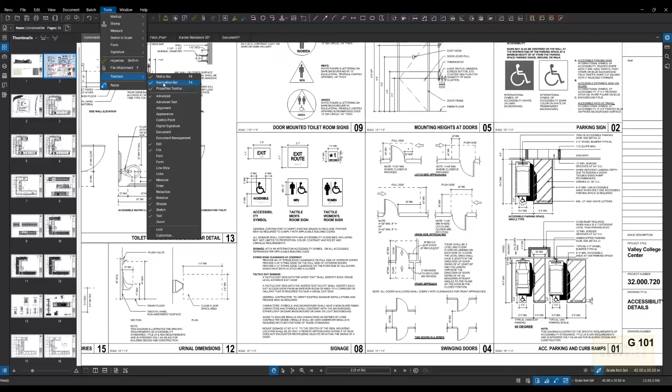Next, I'm going to go to the Tools menu. One thing I go through in all my classes is to make sure, if you go down to toolbars here, you have these top three turned on: the status bar, navigation bar, and properties bar. There's a lot of tools in here that people don't realize are there, so we're going to show you what those do. They come down here, the status bar and the navigation bar.

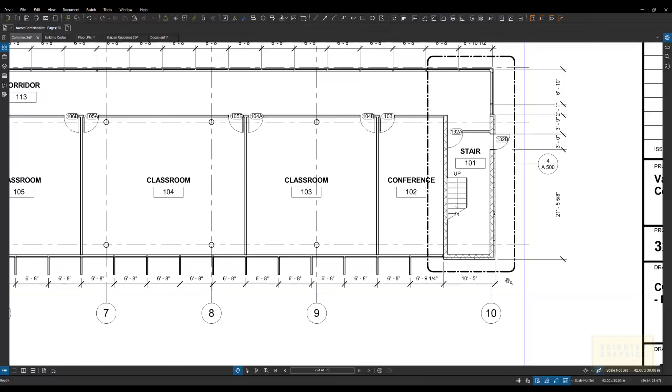This top one is the navigation bar. I'm going to jump to another sheet here. Way over to the right side, you see this little button that says disable line weights. I have mine disabled. If I turn that on, you'll start to see the thickness of those walls show up. You can turn the line weights on and off. Sometimes that helps you with measuring and things like that.

Right next to that is a dimmer. So if you have a lot of markups on your drawing and they're getting lost, you can click on this fade and it's going to fade to whatever percent you want so that those markups stick out and you can find them easily. That's your dimmer switch and a common use for that.

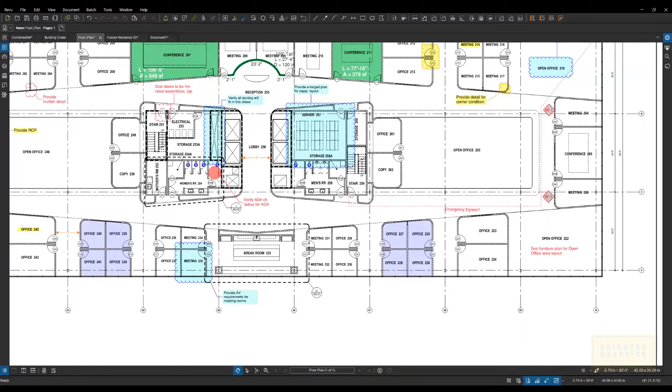Underneath that is our status bar, some really good ones. This one is snap to content. If you're ever doing any sort of measurements, you're going to want to make sure you snap to the content of the PDF. Snap here and here, it's going to tell you 5 feet. You don't have to zoom in and try to find the center of those pixels. You can snap to the content of the PDF and it'll give you accurate measurements.

The other one I like down here is the reuse markup tool. You'll notice when I finished that command, it kept me in there so I could do another measurement. That's my reuse markup tool. If I don't have this turned on, as soon as I do one measurement, it kicks me out of that command and I need to start over again and go find that tool.

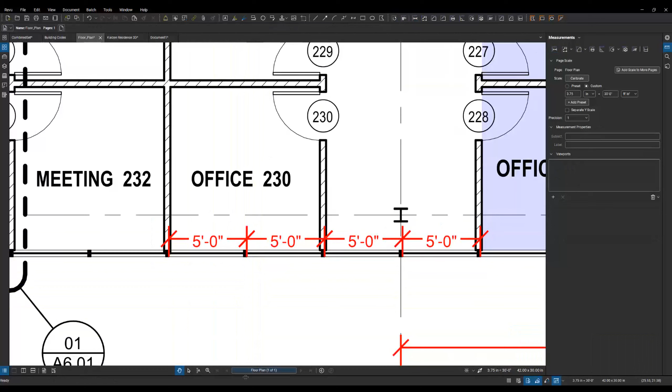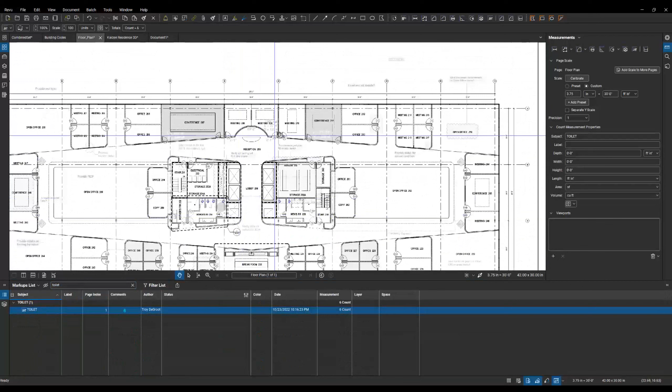Okay, next we're going to go down to the markups list. This little blue line here, we're going to drag up. A tip in here: if you're looking for a certain markup, there's a search bar. You can start to type in whatever you want, like toilet. I can do a search for that, and it'll narrow down and show me just the ones that say toilet. You'll see it grayed out all the other markups, filtered them out of my list just to show me what I was looking for. So that's the search.